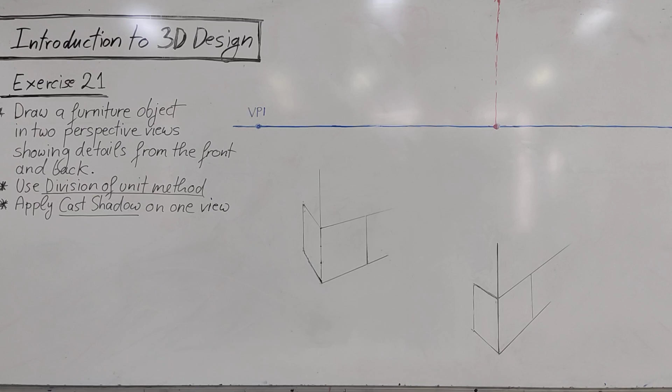Okay, so today our last exercise, we will draw an object. It can be any object, but we will draw a furniture piece. And when you draw, also try to draw something regarding this topic.

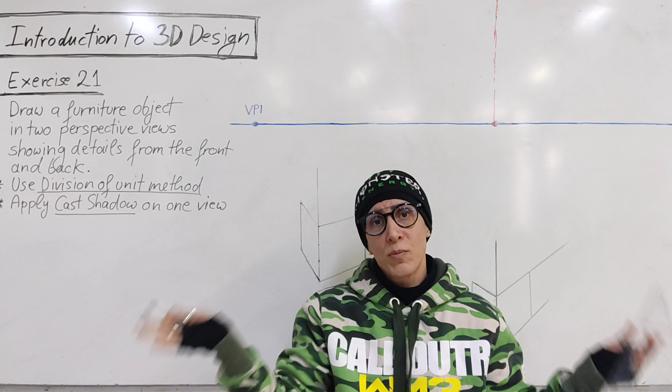We will draw the furniture piece in two-point perspective, in two different perspective views. So we will see details from a frontal view and from the back, but in perspective. This is different than orthographic drawing where we have front, top, side view. That is a technical drawing with measurements. Here we don't have measurements.

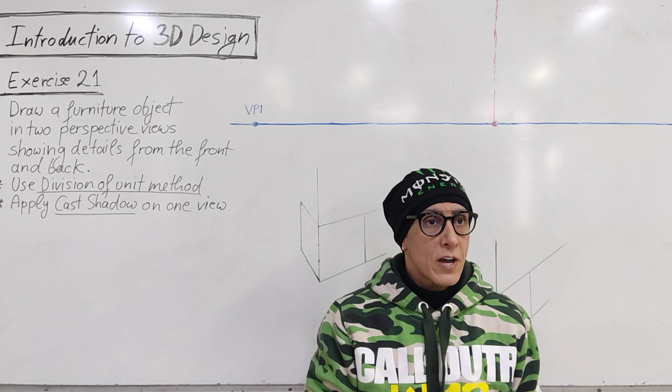It is a sketch. This is used when you're still designing something, thinking of a design, and you're drawing without measurements. You don't know the measurements, okay? So you want to show whatever you try to design from two different views, because sometimes if I draw this table from this particular perspective view, I can see some of the details. Maybe there is something interesting from the other side, okay? So I can draw it from another angle, two different angles, both in two-point perspective.

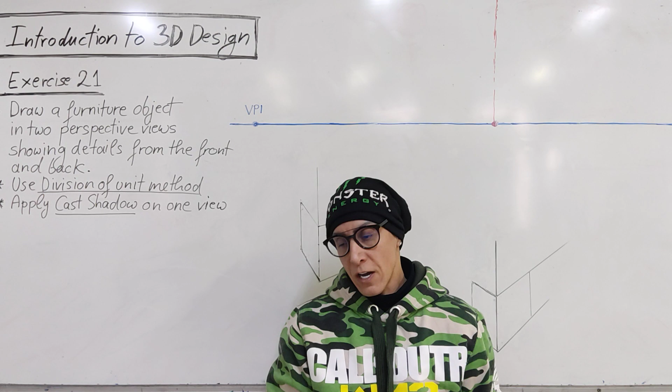When the object is small enough, it is placed in the same drawing, two views, okay? So one major view, one secondary view that shows other details to complete the idea of what you are designing. Now, both views usually are done in the same size, in the same proportion. Sometimes you can make one view bigger, the other one that is less important, a little smaller, okay? But still, the goal of this is to show details of the design.

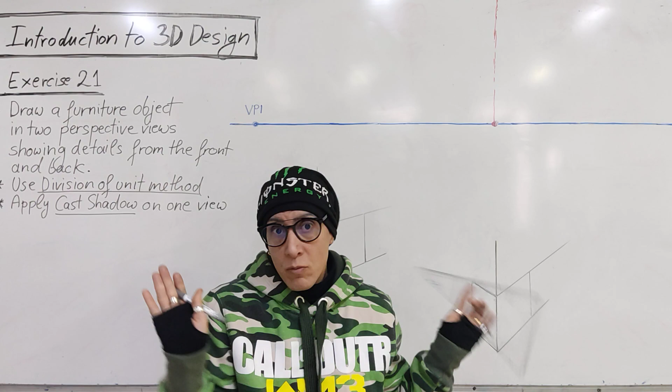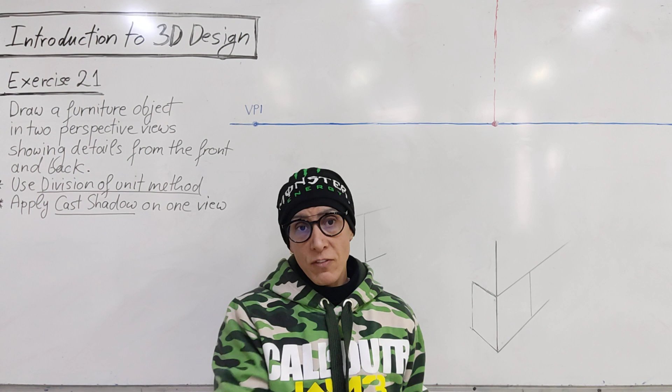And we don't have measurements here, we have no idea about the measurements, so to get the proportions right, we will apply the division of the unit method, just to get the proportions right, okay? Sometimes it can be a very fast sketch without any method applied, but applying this in this exercise is to remind you of what we studied before, and to see the application again, and also because in basically any drawing you draw, when you use this, the proportions are correct, not measurements, proportions.

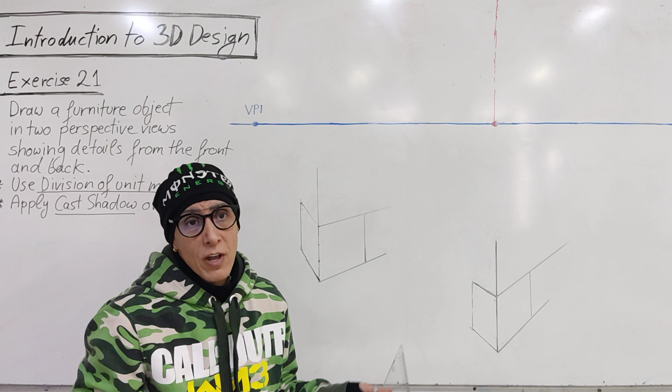Okay, so if I want to draw a unit of this size here, I know exactly where it will end. I don't know the size of this unit, for example, but I want the same one here again, and maybe here, and maybe there. So I need to know where it will end. I can estimate, of course, but if you're not experienced, maybe you will make it too short or too long. So the division of the unit, very fast method to find the locations of certain items.

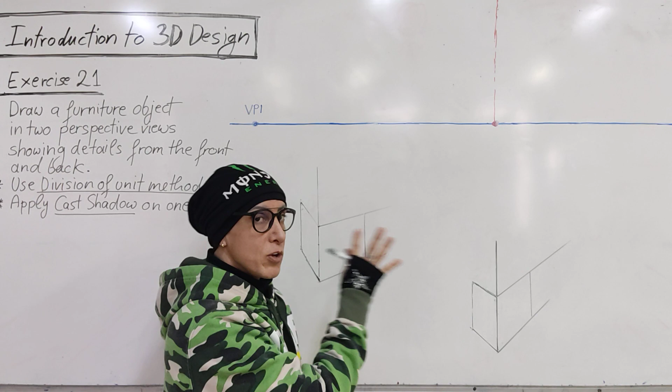Now, we will also apply cast shadow on one of the views. So we will have two views, and we will apply cast shadow on one view. Why the cast shadow? Again, it's to practice what we learned last class. In addition, when you have such drawings, it is nice to have one of them with a shadow, just to give more depth to the drawing, more realistic, and so on. So it's not a must in design to apply the shadow, but it can give more realism and more beauty to the drawing.

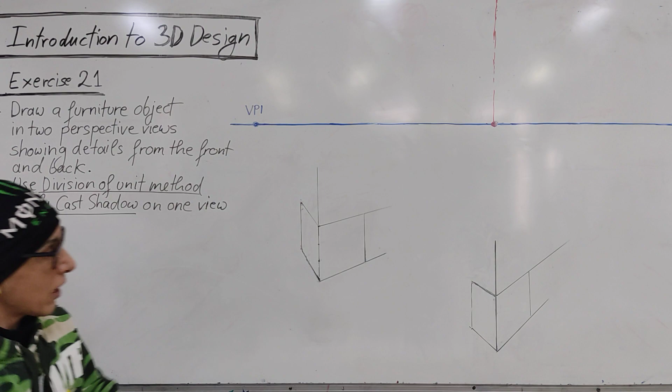So, of course, you apply it only to one view. Okay, now, I started already here. I will draw one of the views, and then I will draw the same from another point of view, okay? So we have the horizon line, two-point perspective, and I started with the first edge, my first edge. I already defined my first unit that I want to draw.

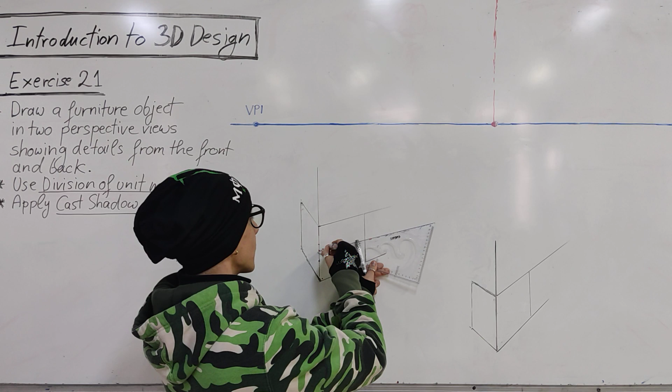Now I need to draw this unit here again. So where is this line going to end? I will apply very quickly the division of the unit method. So from here to here, halfway, okay, to the vanishing point. Now, from this point through this point, we will draw a straight line.

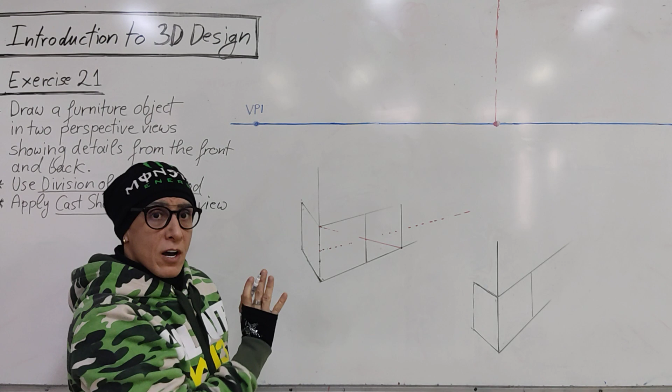So, where it will touch this line, here is the location of the second object. So I know now that this is the same size like this, but in perspective. I don't have to estimate and make mistakes. Now, from this side, we just have this piece, so I don't need to divide it and find the other pieces. Now, from this one, we will take to the vanishing point, and from this point to the other vanishing point.

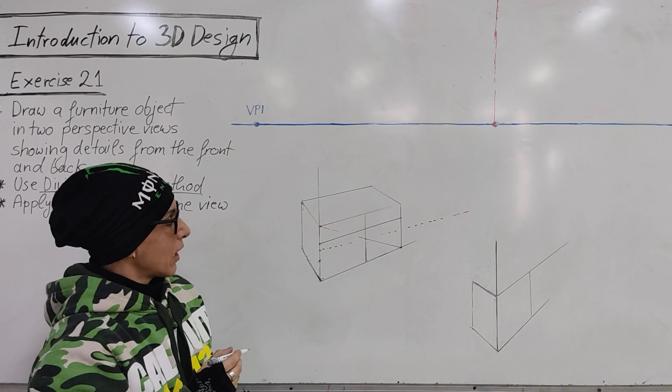Okay, now I want to put some details in this area, so I will divide it into 3 parts, taking this from this point to the vanishing point. Now this piece here, this area and this area, I want to divide into drawers, okay? 1, 2, 3, 4, okay?

So how do I find where to put these 2 lines? I don't need to apply the division of the unit here, I can just put diagonals. So, diagonal from here, diagonal from here. Okay, here is the midpoint, so here is where it is. The same here we will do. Here is the midpoint.

So now we have 1, 2, 3, 4 areas, and I know for sure that proportionally they are divided correctly. This one and this one we will leave as they are.

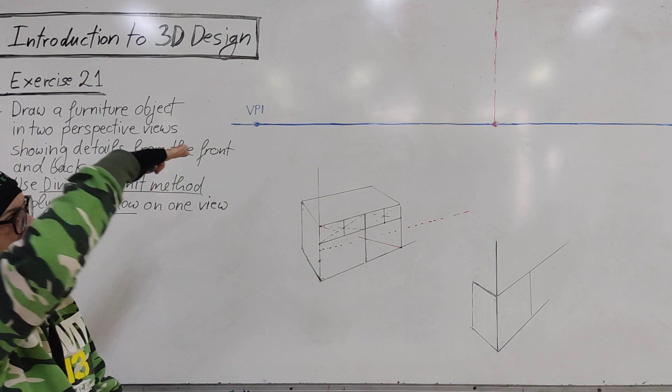Now we want to put some detail in this area. Okay, something go up. So what the size, I don't know, I estimate. I want it to be the same like this one, okay, double. So this one here, again, how much is this? 1, 2, 3, 1, 2, 3, somewhere here.

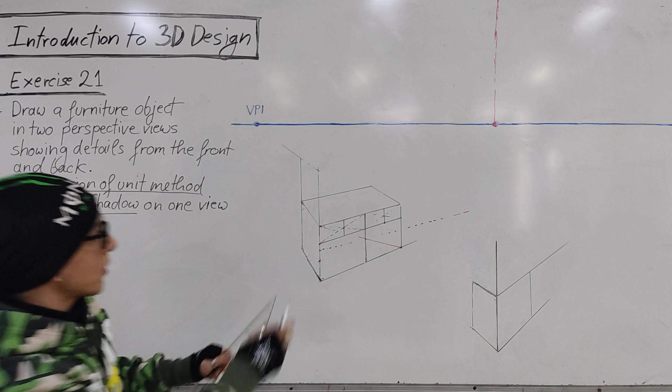Now this point I will take to the vanishing point, and from here up to find the location. Now from here I will do the same, a line up from this point to the vanishing point.

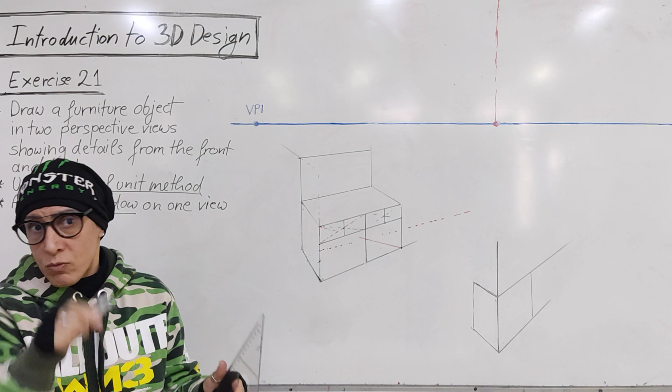Now, any real object has a thickness to the material, so we cannot just leave it a line. Some of you, when you draw, you leave just one line, but in reality everything has a thickness, even if it's very small. So I want to put a thickness to this element.

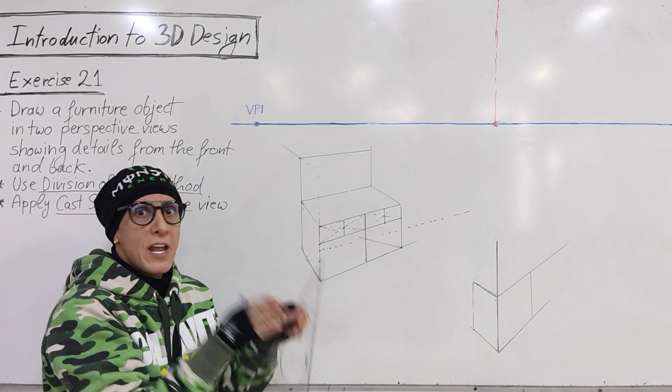But because this is a sketch, I can immediately just start here, put a thickness, and continue freehand. But if we want a little bit more accuracy, we estimate the proportions. For example, from here to here, I imagine this has a specific size. I want this thickness to be, say, 1/4 of it, or half of it, or 1/8 of it. So how do I find it if I want to draw it proportionally correct? We will divide this surface again into half, half.

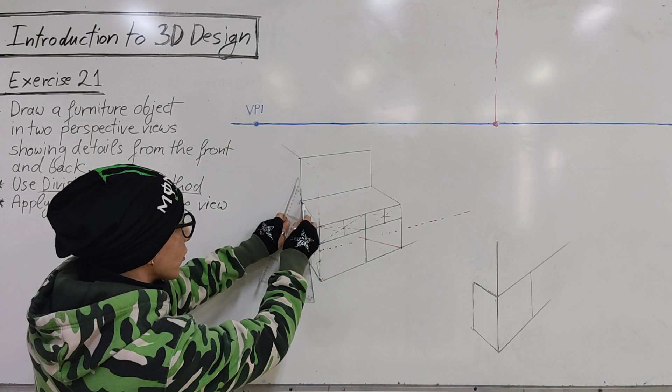So here is the middle, okay? Now I want to divide this piece again into half, so I can find a 1/4. It's a very quick method, but very useful. So this part here is 1/4 of this. Now if I want to make it even smaller, I can subdivide and subdivide and subdivide and find proportionally correct thicknesses. Now let's leave it at 1/4.

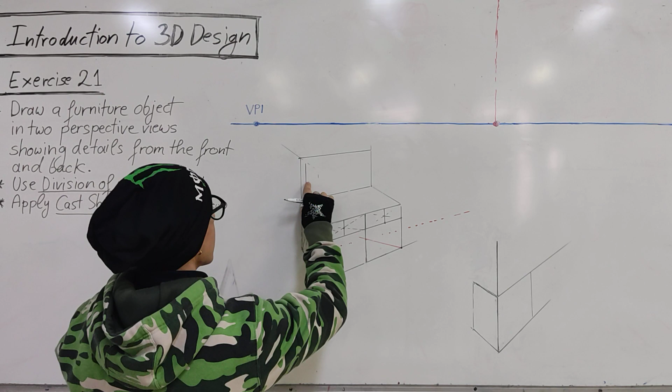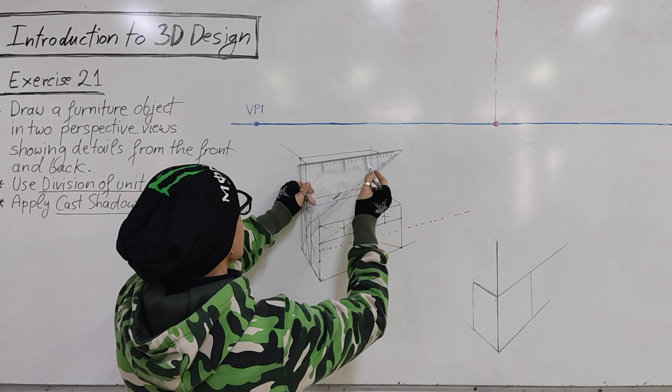So put this line up from here. Now, we already know these 2 points, so we will take them to the vanishing point to see where they will intersect. From this point to the other vanishing point, from here up, and from this point to the vanishing point, and they should intersect. So this one here will be the back.

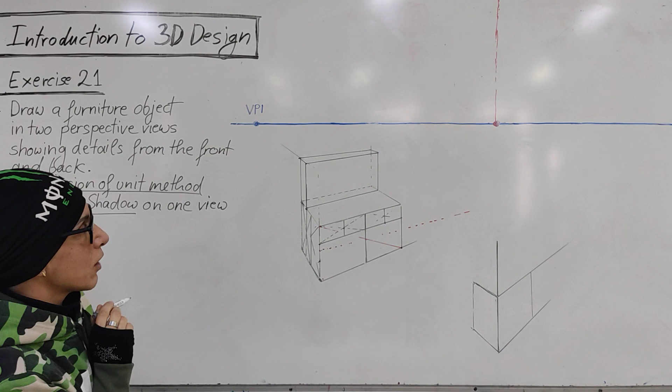Now I need to find the middle of this. Why? Because I want to draw half a circle here and from the back, so it's something of this shape. I know this point, I know this point, I need to know this point, where it's located. Now, very easy, look, this is the midline here. From this point I can take to the vanishing point, from this up, here is the midline. Or you can divide the surface with a diagonal, find the midpoint, same thing, very easy.

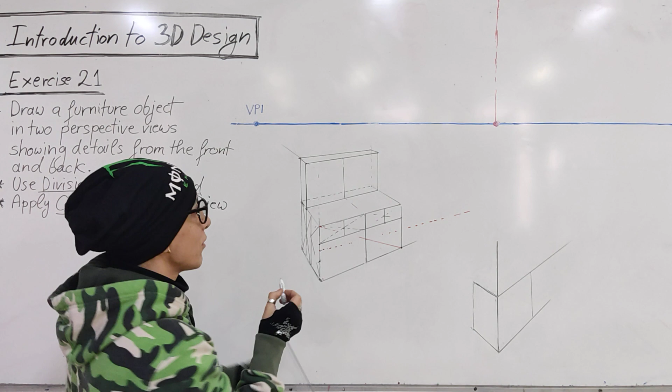Now, this point, to find it on this line, we will take to the vanishing point. Here is it on this line. Now we will draw the curve 2 times.

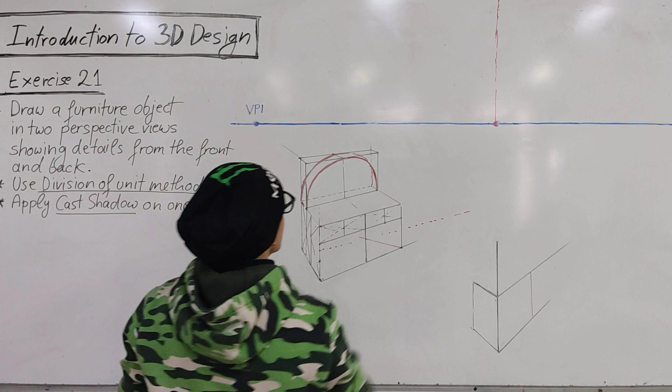And from the back, you need to draw it in this way, not freehand, because this one at the back is very easy to mistake. So this is the start point, this is the midpoint, and this is where it ends. But this part is hidden, okay. If you don't do it inside the box, it's very easy to make mistakes.

Okay, now to continue, we will have other details in this area, handles, something to use in this detail. So how do we put that? Again, it's good to find the midpoints. This is here the midpoint of this, we already found it, or put diagonals again and take it to the vanishing point.

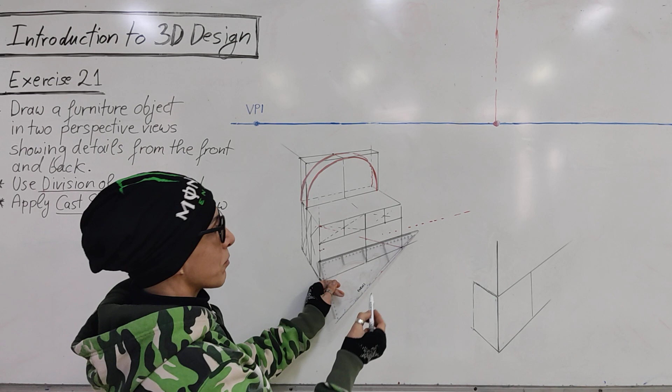Okay, so this is the midline. Where is my handle located? It's nice to find the locations in general before you just start drawing freehand. So if it's below this, or exactly in the middle, this midline will help me. Now here is the midpoint of the entire shape. What I put from here, the other one will be a little smaller because this will go to the perspective.

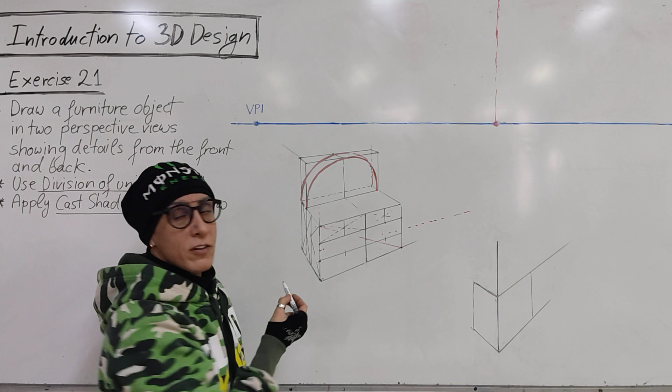Now, if I want to be very accurate, I will start with a unit here and subdivide it using the division of the unit method, to find exactly what I want in the exact location. This is if you want to be very accurate with your drawing. Now, I will just do it freehand.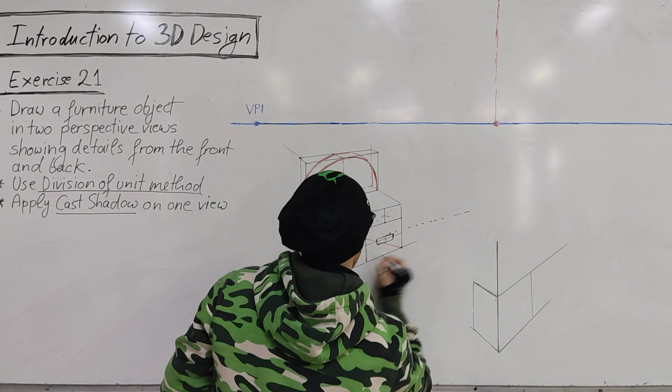Now these lines, of course, need to go to that vanishing point. So if you want to be very accurate, you can start with one of these units and subdivide it to find the location of this and the location of this. On your paper, I prefer you to be a little more accurate. If you have details, I want to see how you found them. Now these lines, sorry, they need to go to the vanishing point.

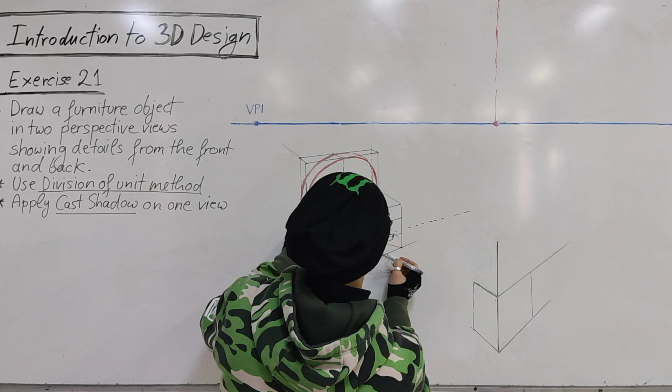I'm just putting the thicknesses of whatever I'm designing. It's very rough, but we need to have thicknesses.

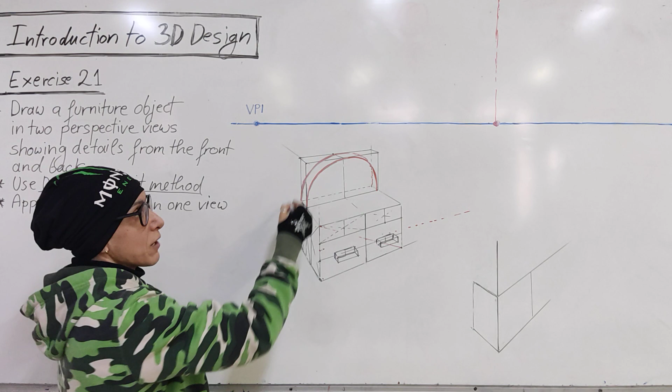So we start with a box no matter what the shape is. We need to start with a box, and then if it has a curve, we draw it like we did here. So we have one point - where is the midpoint? Diagonal, diagonal, here is the midpoint. So we can draw it now more accurately. The lower one, again, from this midpoint down, from here to here. And we have a thickness, it will not be visible here. So we have a thickness. Let's draw it here again, very fast.

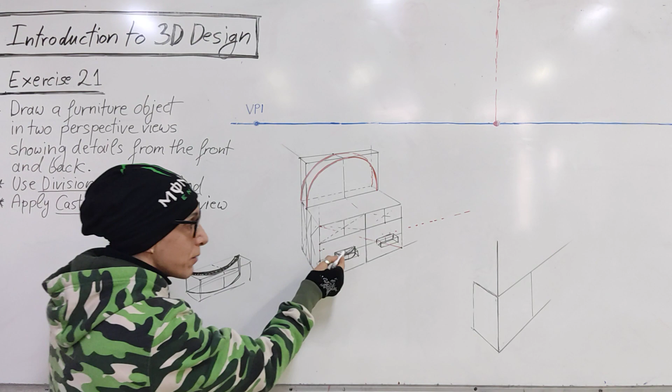So when we have this kind of shape, this one and this one, you cannot just leave it like this on the paper. It has a thickness - the thickness of the material - you need to place this thickness here. You cannot just leave it aligned. Whatever you do, even if it's a millimeter or half a millimeter, if you put it here on the paper, it will be visible because your lines are clean. Now, of course, you will not copy what I'm doing - you will do your own designs and drawings, so it will be totally different.

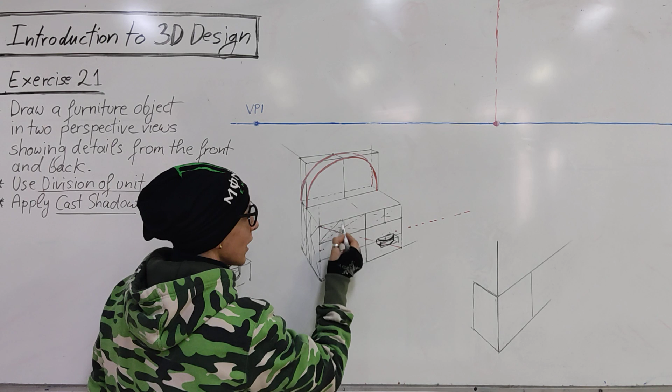Now here again, if we need the midpoint, we find it: diagonal, diagonal, here's the midpoint. What I'm going to draw - if I want to draw a circle, we draw the square first, in perspective. Then whatever length we have of the object, this one can be a circle, and this one here until where... so this is another circle. Then these two can be connected. Now how I connect them, they could have all kinds of shapes - this could actually be a ball that you can handle and take out.

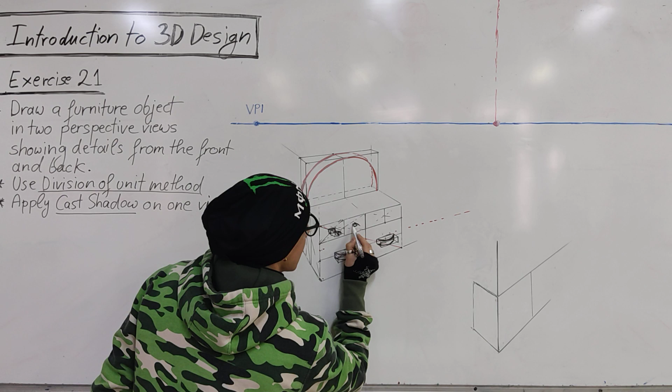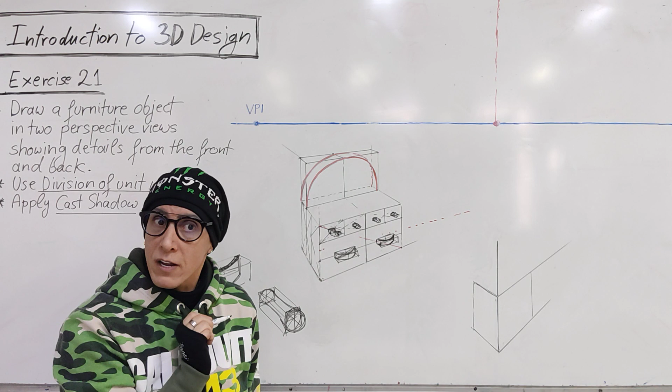So first you need to draw the box here, then you draw the circles, then the other details. Now I will draw them really fast here, but in reality you need to be much more careful. Everything starts with a box. You draw the circles according to what we learned, and then draw the other details, because as you get more experienced you can draw it freehand and it will look correct. But for now, no - you need to learn the method in case you cannot draw something freehand. So it's very important to learn how to construct correctly.

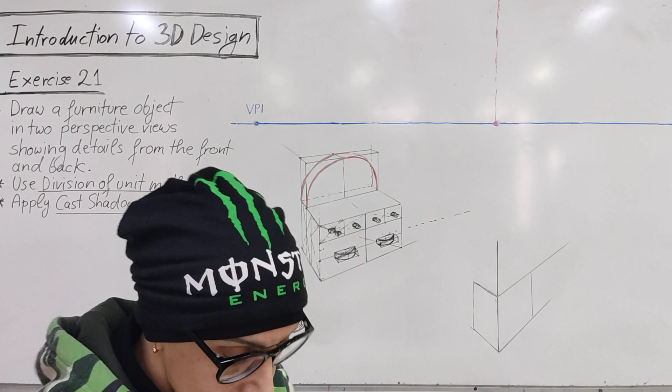Now, since we have this object ready, let me make it a little darker here. So we will draw this one, but rotate it now from the back to see other details. We can do it, as I said, the same size, starting with the same size and then taking it to the perspective, or we can do it smaller. Let's leave it the same size. But now look - where I place it will play a big role in how it will look. So if I place this object not here, but here, or here, it will look totally different in perspective.

So the location matters, the size matters, the location matters in this area - everything affects the way it looks. So I will start with the first edge. I will put it the same size like I started here, and this object is twice that size - so this one times two, until here. Now we will take it to the vanishing points.

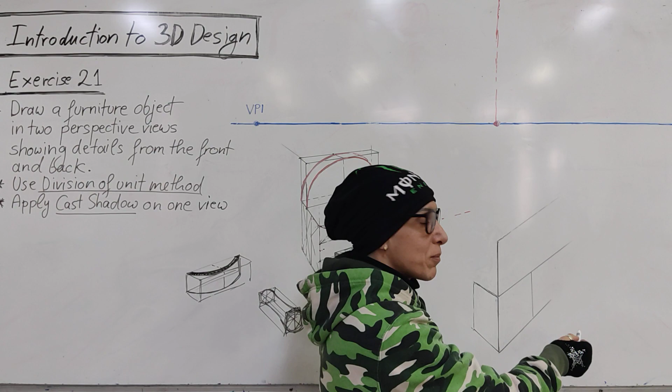I already located the first element, which was this one here. Where is going to be the end of the box? Dividing the unit, this line, half of it, to the vanishing point, from this point through this point.

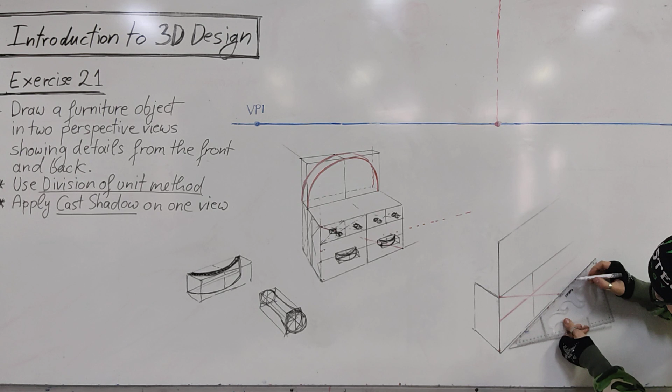Where it will touch this line, here is the end, so from this point up, here is the end of the box, or the furniture piece. This element I already estimated.

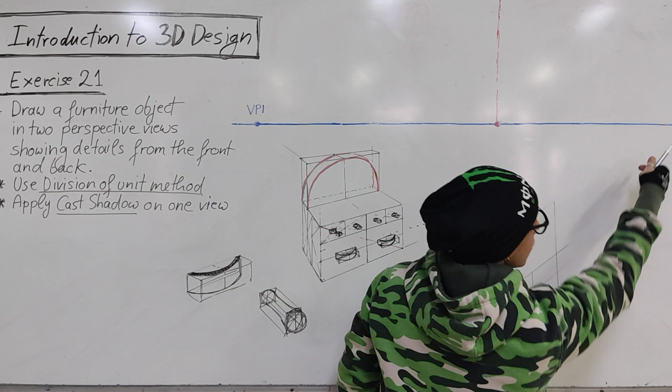Now be careful, because this is freehand. What I mean is we don't have measurement. So if I place this closer to this vanishing point, we will see this as bigger. If we place this line closer to this vanishing point, this will appear smaller, while this will appear bigger. This one we don't need to worry about because we divided it.

But here, this one we cannot divide. Or we can actually make it in half and divide it, but no need for this kind of thing, it's enough to draw it like this, from this point to the vanishing point.

Now, this element here, which is this one, has a thickness. So we need to find the quarter of whatever we draw here. So let's do diagonal. Diagonal, this is half. So this is half of it.

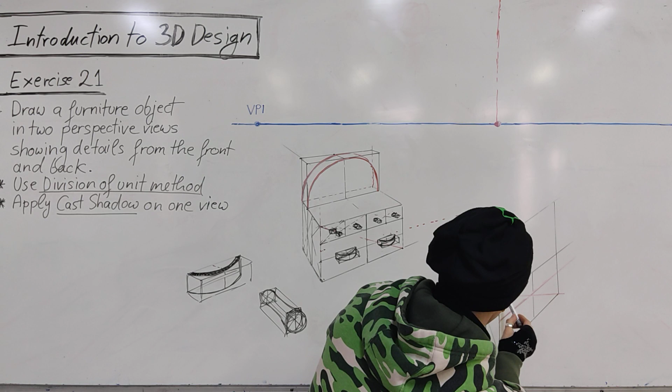Now this element here I will divide into half again. So this point here makes a quarter of whatever I projected here.

So from this line up, very easy, from this point to the vanishing point, where it will intersect, from here to the other vanishing point, and from this point to the vanishing point.

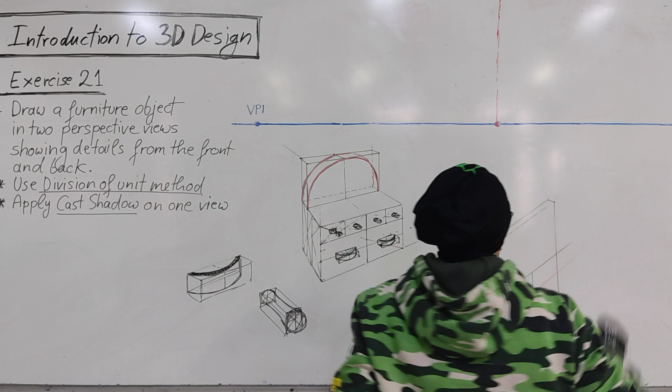Okay, now we already know this location, which is the middle of this line in perspective. I always say 'in perspective' because in reality this is not the middle visually. This is bigger than this. So from here we will put it up.

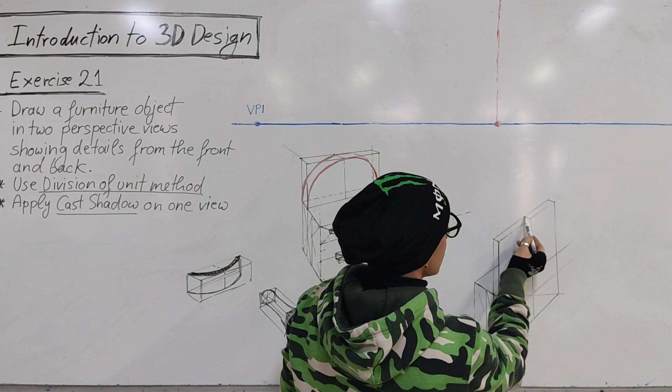Now, from this point to the vanishing point, to find the location on this line. This point to the vanishing point. And from here, also from this point to the vanishing point.

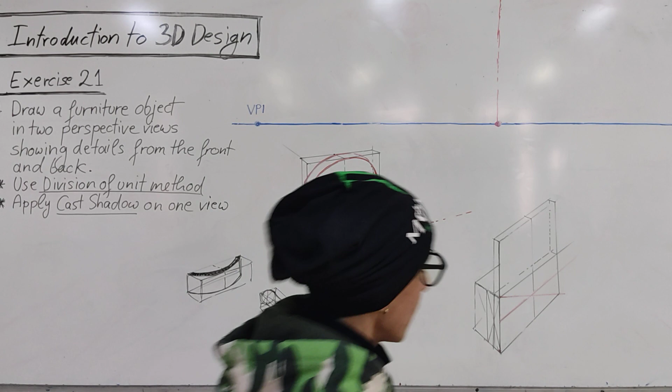Okay, so now it's time to draw this circular object, the curve. So we have these 3 points, this one, and this one. And from the other side, okay.

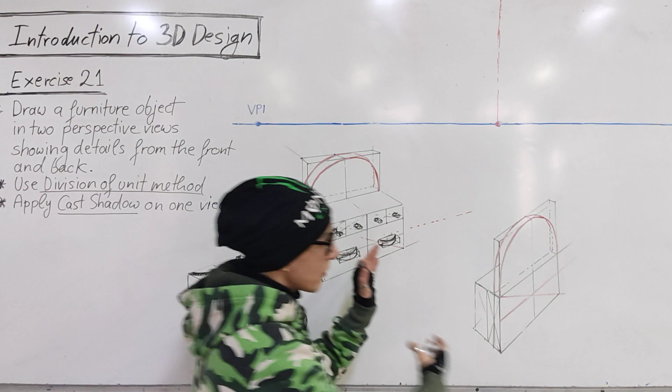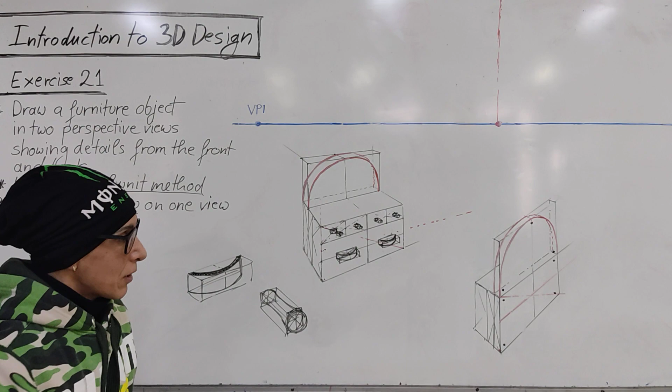Now this is a little bit from the front. We can see some details. Now from the back, what can we see? Well, this is a very simple object, but some of your objects can have more details. Whatever they have, you will place. So what are the details in the design? You will place them. If it's more complicated, it will have more details. Sometimes you have details from the side. It depends what you're drawing.

So this is the idea, to draw a design from 2 different views on the same paper in perspective, when you still don't know the measurements. Just to explain, this is an explanatory sketch to explain what you are designing, what you are thinking about. If the teacher or whoever is looking says okay, this is a good idea, then the next step is to find the measurements, to draw the orthographic, isometric, and so on, the other types of technical drawings.

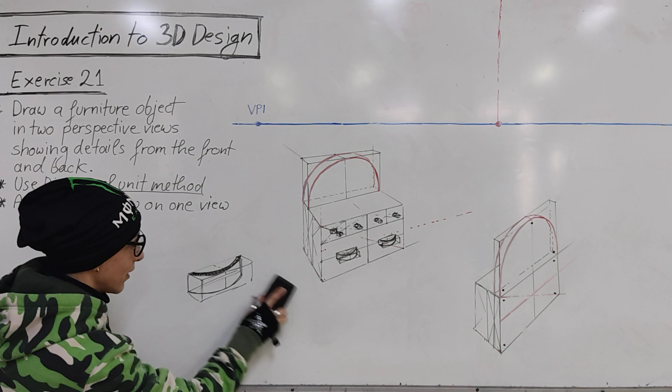Now, let me delete this area here, because we need to draw the shadow, the cast shadow.

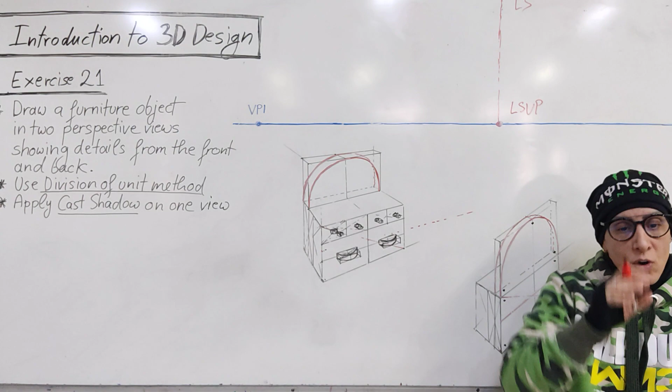Above the horizon line, you can put a light source and the light source vanishing point. Now, remember what I said last class? The light source — the more it goes up, the shadow will be shorter. The more it goes down, the shadow will be longer. Also, the location of this — I can place the light source here, or wherever, it doesn't matter. But every time you will have a different shadow on the object.

So now I prefer if my light source was more up, but there is no way to reach it, because it will be a little bit long here. So let's hope for the best and start drawing.

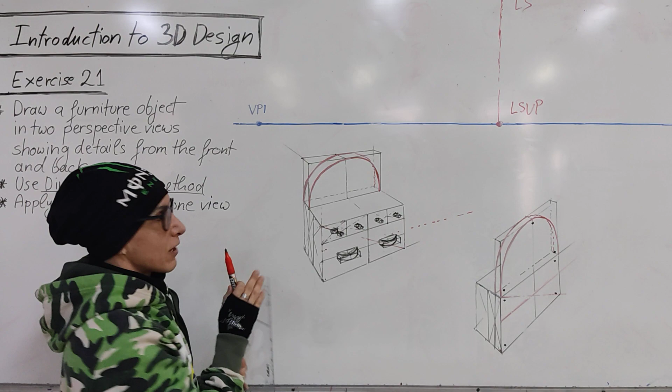Now this object, we have what? Upper points, lower points, like last time. The upper points are which? We have upper points, this one, this one, this one, this one. And we have lower points, these 2 here. On this point also we have, this is also an upper point.

This one, but this one maybe we will not need it. We only need this actually here, so I will leave it for now. Now these points here, we don't need, because they're towards the back. We only need the points from the front where the shadow will hit these corners.

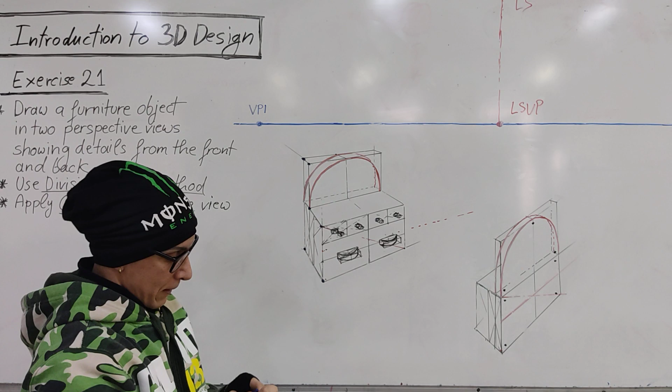Now, from the light source through the upper points. So where is the light source?

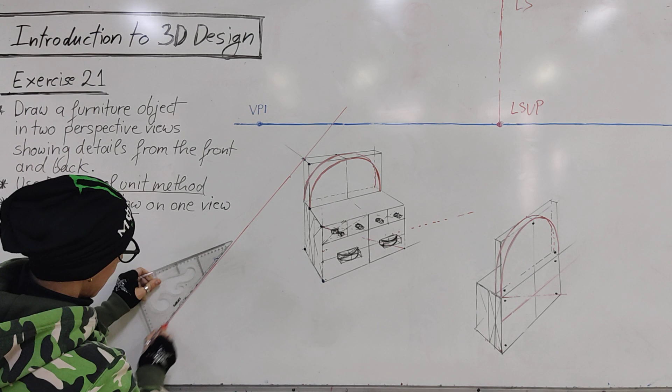Now I will do upper point, lower point, upper point, lower point, not to make a mistake. If we put all the lines together, we might make a mistake about which line connects to which. If you're careful you won't make a mistake, but it's still more clear to follow this way. So this point is the upper point. Now the lower point, which point? This one, exactly below this point, okay? It goes through this light source vanishing point, the light source vanishing point.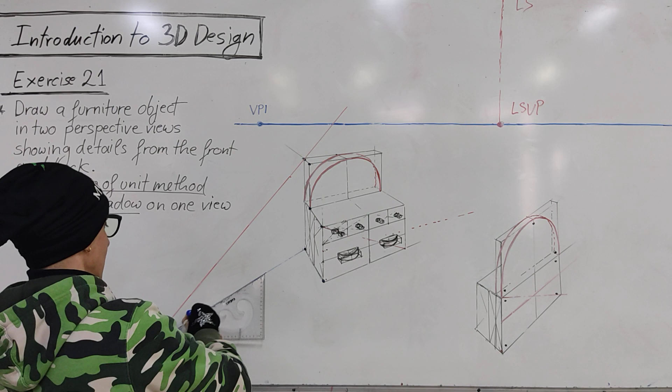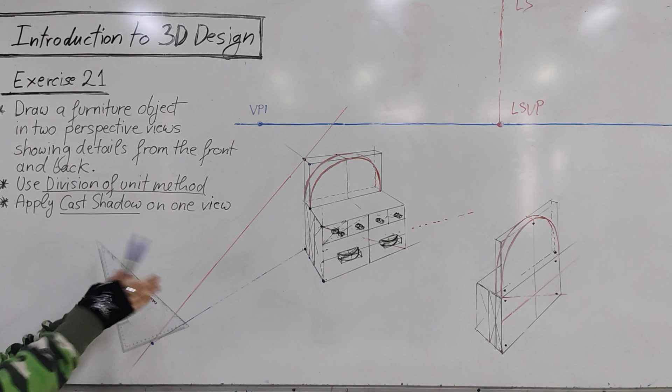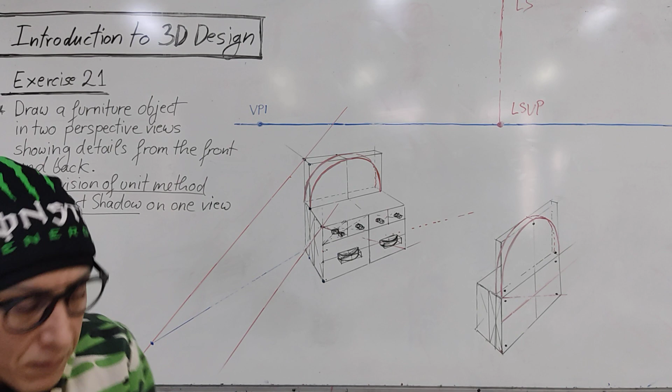Now this point with its lower point, do you see where they intersect here? Next, this point with this point, okay? There is no line here, but I have to imagine this point with its lower line. Or let us do these two points first, and then we will see the other two. It doesn't matter from where you start. Let me do this point first. So the upper point, the lower point, upper point through the light source, and the lower point, this one, to the light source vanishing point.

So where they intersect here, this point with this point, you see they form a triangular shape, okay? Now what else do we have to do? We need to find this point. Oh sorry, this point now and this point. Let's find it.

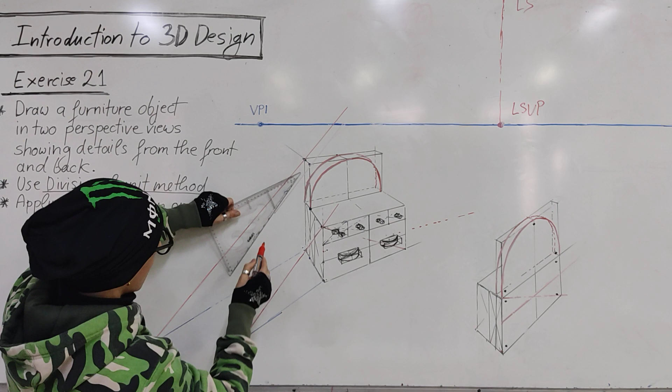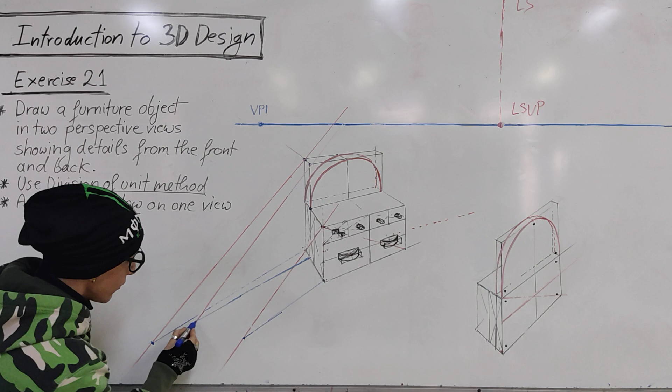So this point through the light source. Which point lays below it? This point here, which point is exactly below it? This one here, okay, so we take it through the light source vanishing point, and this is where they will intersect. But we also have this point, because this shape here is changing, so it makes a corner. So this point lays on this line, which line? This line, okay, it lays on this line.

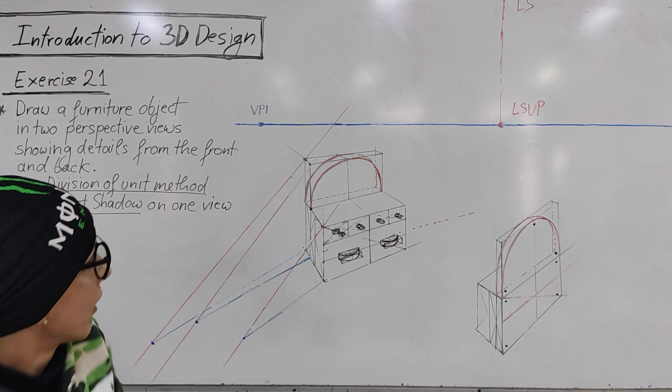So this point through the light source, this point through the light source, where will it intersect this line, okay? Do you see this line here? Which is this line, okay? So it lays on this line. So for any other points that lay on the same line, you find the line and then you find the locations.

Now we connect the points. So these two points, 1, 2, 3, 4, okay? We connect these, and we connect these. Yes. Okay, wait just a minute. You need to go now? Okay, go.

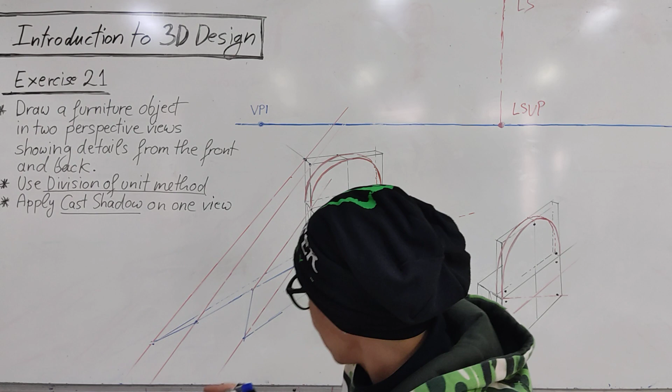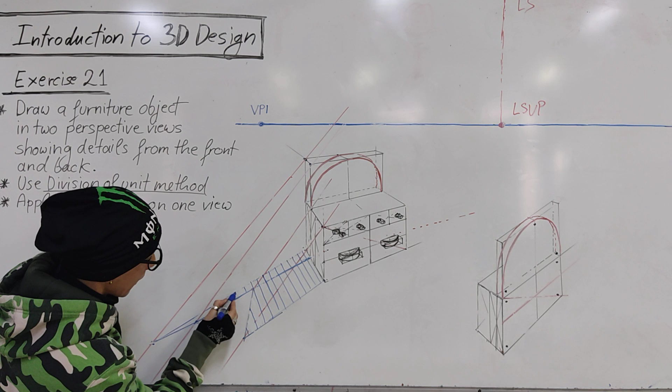So now let us shadow the area that created the shadow. Of course, you follow the line, as we said last time. So this is the resulting shadow area.

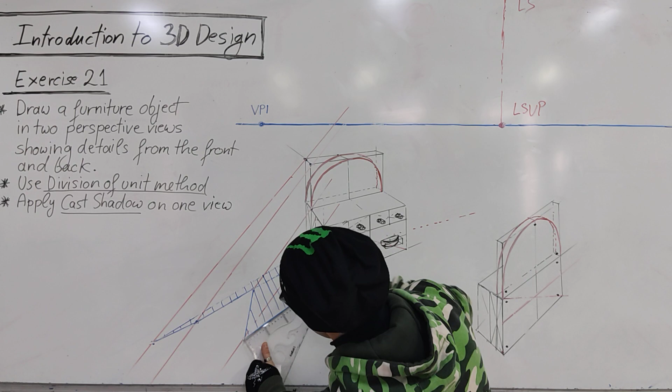So when you connect, just be careful when you have a lot of points. Always choose the upper point, the lower point, and connect. Then upper point, lower point, connect the major points. Then find if you have anything in between that needs to lay on the lines, and you place them. This way it's safe to do.

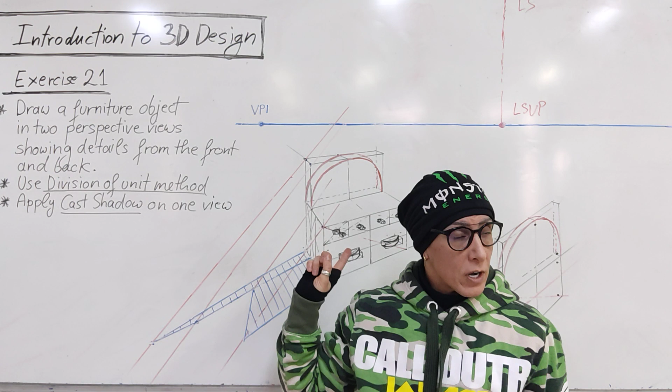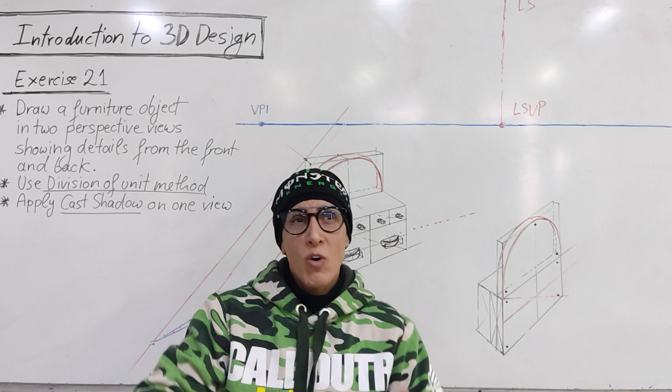Now this is basically it. Now, what you need to do for your homework is to draw any furniture piece from your mind or from looking at one, it doesn't matter, but it must be different for every student. Do not copy this, do not copy this, understand me, okay? Also try to keep it medium, don't put so much detail that you start making mistakes with the drawing. Keep it simple, it's important to understand the application. And I need to see on the drawing the division of unit method applied and cast shadow on one of the views. Now here we have some examples.

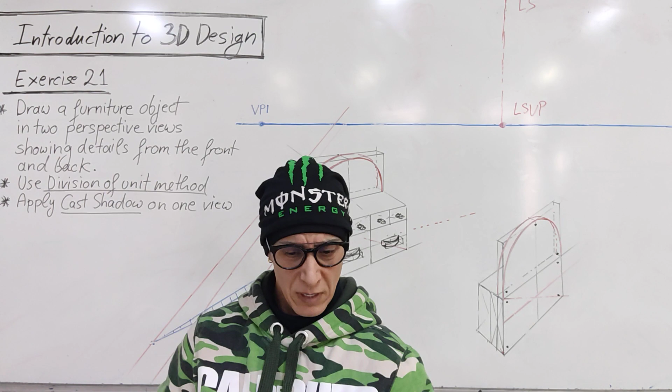Okay, this is some kind of a chair, okay, and on one of the views the cast shadow is applied. The shadow here is wrong, it should have been applied using one of these lines, but never mind, it's still a clean drawing, nicely made correctly, okay? Here is the chair in two different views, the division of the cube method, the division of the unit also applied correctly.